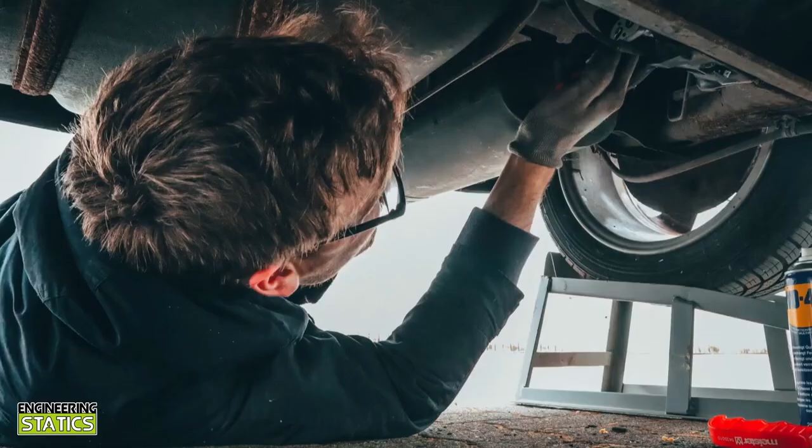Let's start with what it is not. Don't confuse the word mechanics in engineering with the profession of a mechanic. Although in engineering you will learn the wonders of WD-40 and duct tape for fixing things, this is not the core of what mechanics means in an engineering sense.

For engineers, mechanics describes the behavior of bodies in terms of a state of rest or motion when subjected to forces. There are three key words in this definition: bodies, motion, and forces. What do we mean by these terms?

The term bodies refers to any physical object, such as an aircraft or a rocket, but could really be anything, even a potato. In lots of mechanics textbooks, you will see generalized bodies drawn as potato-shaped blobs like this. We will often use such a representation of a body when introducing new concepts in this course, and you will often hear me refer to it as an engineering potato.

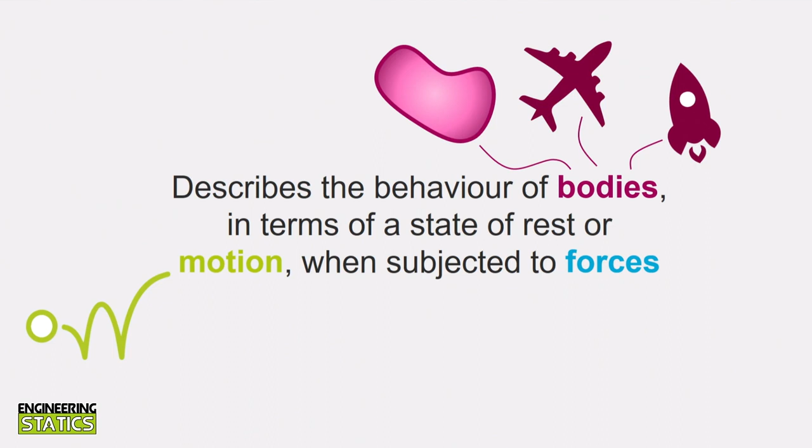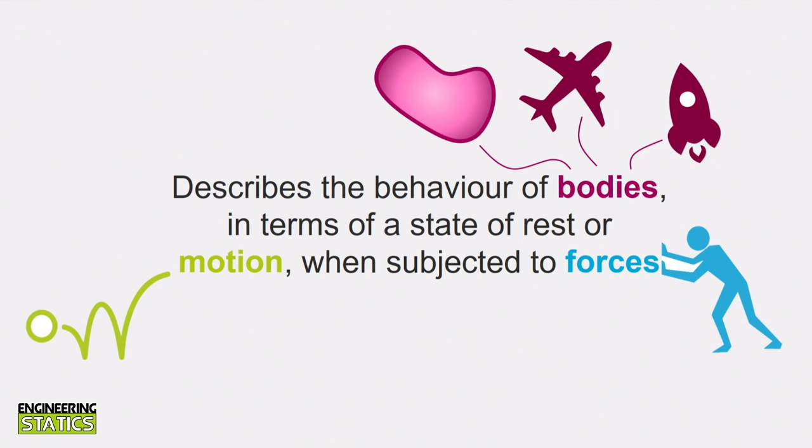Motion is a more obvious term. It refers to how a body moves, including both translation and rotation, as well as speed and acceleration. This leaves us with forces. Forces can be defined as interactions that will change the motion of a body if they are unopposed. How can we think about that in practical terms? If we want to move an object, we can either push it or pull it. So we can think of forces as a necessary push or pull to cause motion.

Lucky for us, a really smart physicist by the name of Isaac Newton came up with some handy laws to describe the interrelationship between forces, bodies, and their motion. As smart people tend to get their name attached to smart things they do, these laws are aptly referred to as Newton's three laws of motion. So let's briefly review these laws.

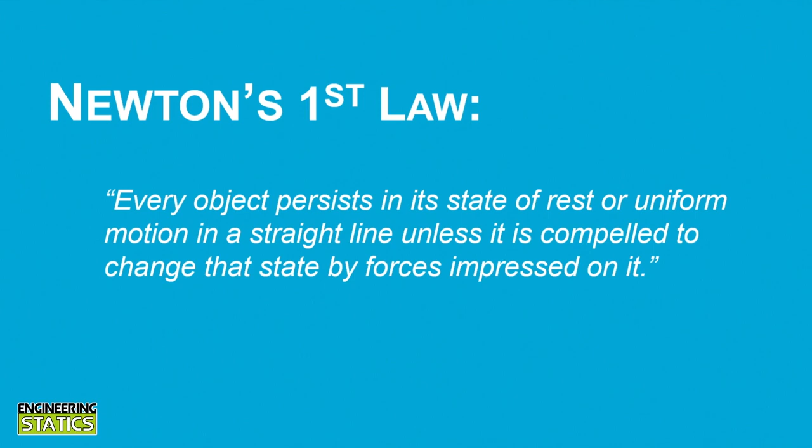Newton's first law states that every object persists in a state of rest or uniform motion in a straight line unless it is compelled to change that state by forces impressed upon it. In other words, bodies are inherently lazy and do not want to change their state of motion. You require a force to push or pull that body from rest, or to change the speed or direction of its motion.

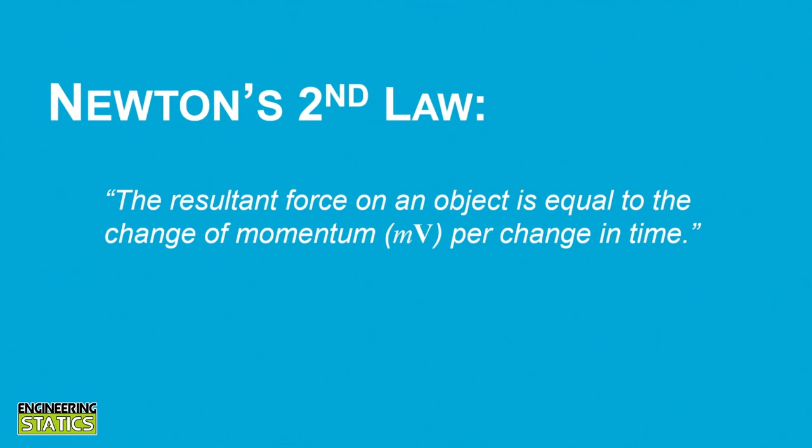Newton's second law states that the resultant force of an object is equal to the change in momentum per change in time. This can be written as F = d(mv)/dt. Now you're probably thinking to yourself, wait a second, that wasn't what I was taught in high school. We were taught that force is equal to mass times acceleration. So did your high school teacher lie to you?

Well, yes and no. Force is equal to mass times acceleration is a special case of Newton's second law. If the mass is constant, it can come outside of the derivative, and the time derivative of velocity is simply acceleration. So yes, force does equal mass times acceleration as long as the mass can be considered constant. This is most of the time valid as an assumption, at least over a small time increment.

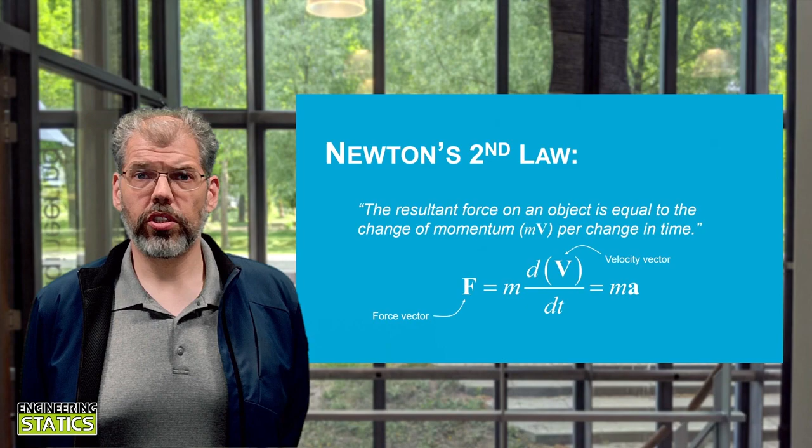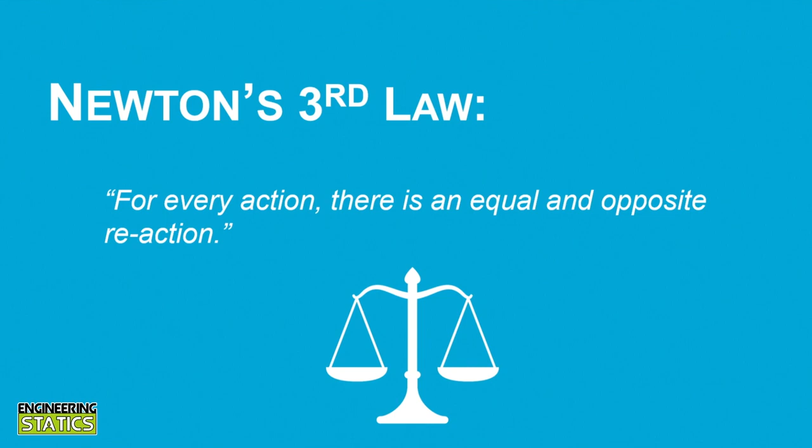Newton's third law states that for every action, there is an equal and opposite reaction. There is a balance to forces, and a lot of engineering is about analyzing that balance, as you will see throughout your studies. Only three laws governing motion, eh? Sounds pretty easy. Or is it?

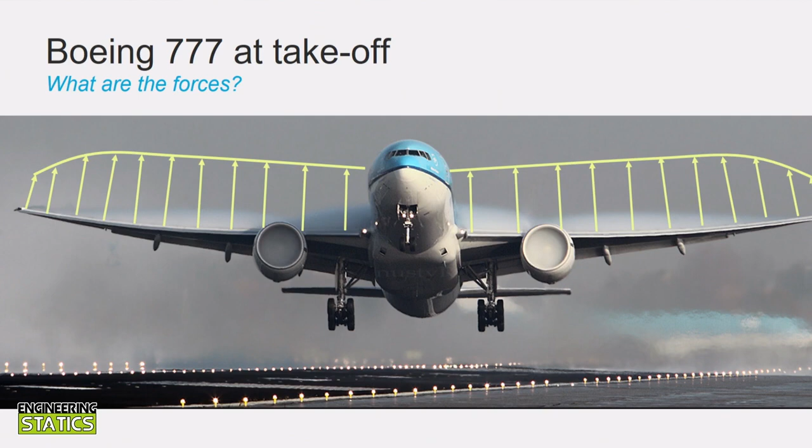Let's try to apply these laws to analyze the takeoff of a commercial jet. Let's start with Newton's second law, force equals mass times acceleration. What are the forces involved in an aircraft at takeoff? During takeoff, there are a number of forces acting on the aircraft. There is the distributed lift force acting on the wings that varies both in the span-wise direction of the wing and in the chord-wise direction as well.

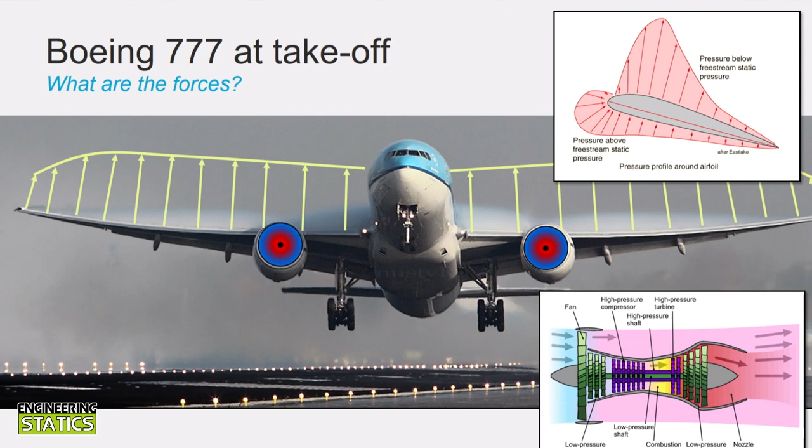There is the thrust of the engines, which also produces a complex distributed load due to the mixing of cold thrust from the fan and hot thrust from the engine core. We then have substantial drag produced by the landing gear and by the entire surface area of the aircraft.

Flight control surfaces such as ailerons can also impart forces on the aircraft, and we shouldn't forget to take into account potential loads due to wind gusts. But that is only one side of the equation. We also have to think about the accelerations.

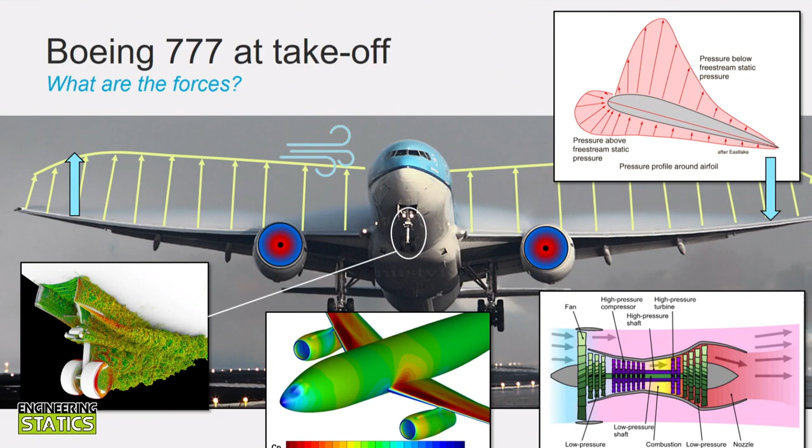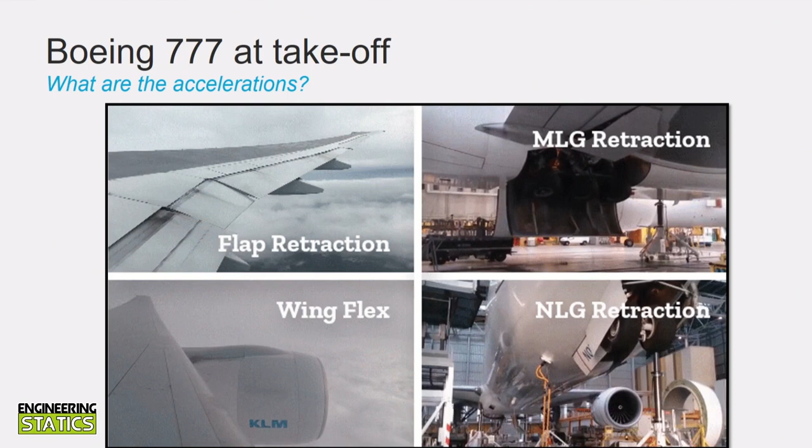In addition to the overall acceleration of the aircraft, there are local accelerations occurring as well. The wings flex, causing different accelerations along the wing, and the flaps and landing gear will begin to retract to reduce drag. As these states of motion continuously change, all of the forces we previously mentioned will also be changing, making the state of motion quite complex to analyze.

So the only way to practically do this would be with a tremendous amount of computational and engineering manpower, just to get one answer, the takeoff conditions. Additionally, in design situations where you're trying to develop a new aircraft concept, the constraints around these calculations will constantly be changing, requiring calculations to start from scratch time and time again. So what can we do about this?

Well, as you will learn throughout your engineering career, engineering is about making models, and models are basically simplified representations of what we are really interested in understanding. So for a lot of engineering analyses, we simplify the problem greatly so that we can produce quick calculations that can be used to make early design decisions.

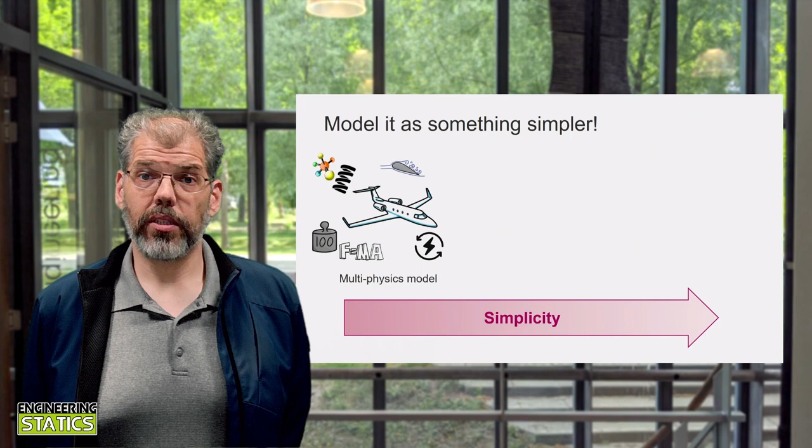For instance, we can take all the complicated physics and aerodynamics of an aircraft and approximate them as simple distributed loads. Alternatively, we can simplify further by reducing the aircraft to a single point mass, with all the complex loads represented as resultant forces.

Now you may ask yourself, don't we risk being wrong in our calculations by oversimplifying? Can such simple models really be useful in the context of something so complicated? This is where I need to tell you a big secret about engineers. Engineers are not concerned about being right. In fact, I would argue that engineers are never right. But that's okay, because engineering is not about being right, but being right enough.

We will make assumptions and simplifications that make our results ultimately wrong, but right enough to be useful in our design process. But there is a caveat to this. Ultimately, people's lives depend on our engineering designs functioning properly. So it is very important to know the limitations of our engineering models and the consequence of these on our designs. This is why it is so important to focus on conceptual understanding throughout your engineering studies.

It is critical for you to understand the concepts behind different analysis techniques and engineering models so that you can properly assess if they are right enough for your application. This is also why you may find your professor paying a lot of attention to whether or not your answer makes sense in the context of the problem at hand. We need to be critical of the results we obtain and not simply follow steps and procedures. But we'll talk more about this in a later video.

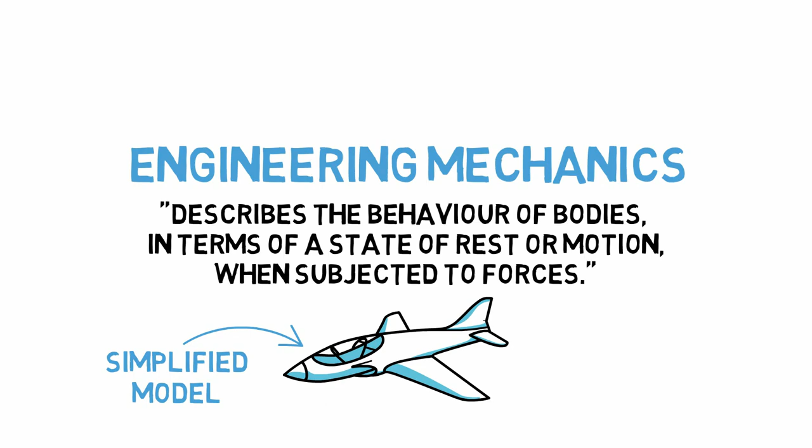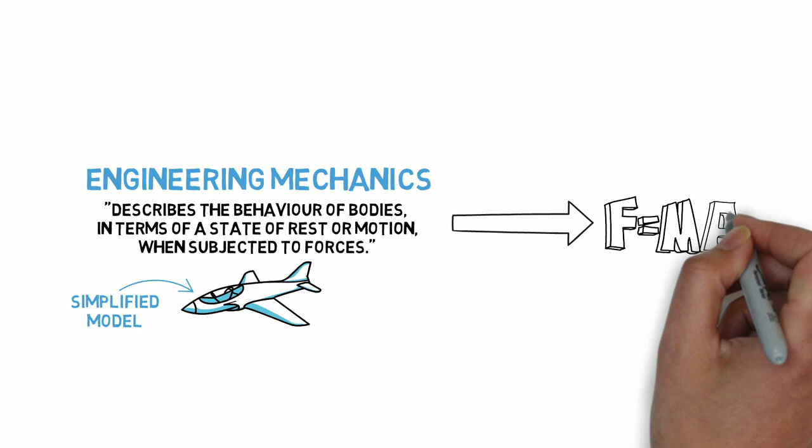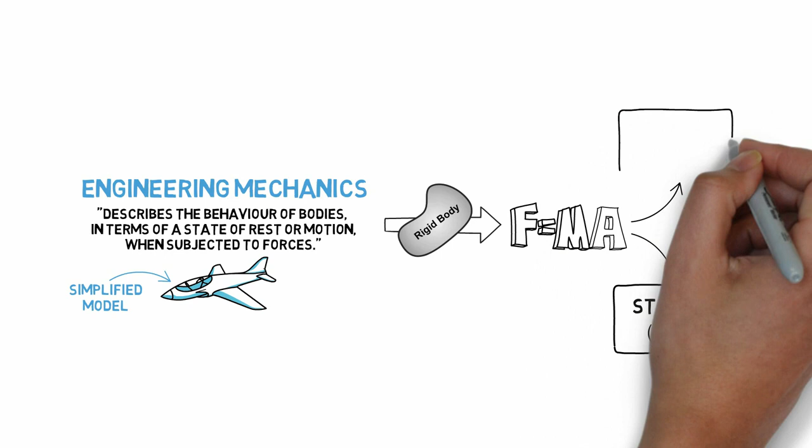We have covered that engineering mechanics is the field that describes the motion of bodies when subjected to forces, and that engineers use simplified models to describe this behavior. Then why are there so many different courses on mechanics? Essentially, we start at the simplest case and slowly introduce more and more complexity into our models. At first, we'll start by modeling bodies as rigid objects, examining Newton's laws of motion for when the body is not accelerating, a course we call statics, and then when the body is accelerating, a course we call dynamics.

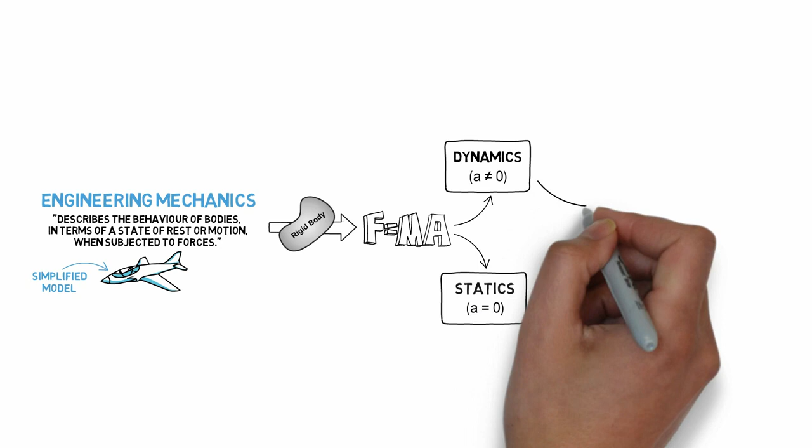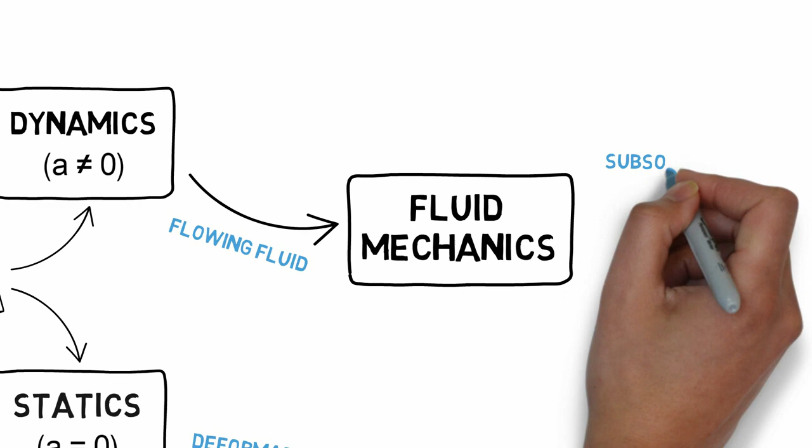However, as you will learn, it is not always appropriate to model bodies as rigid objects. Sometimes we have to consider how the material within the body behaves. We introduce the deformation behavior of solid materials in the course Solid Mechanics, sometimes also referred to as mechanics of materials. Fluids also behave differently than solids, so we examine appropriate methods to model fluid motion in the course Fluid Mechanics. Even this course can be further subdivided to recognize the differences in behavior of fluid flow that is subsonic, transonic, and supersonic in nature.

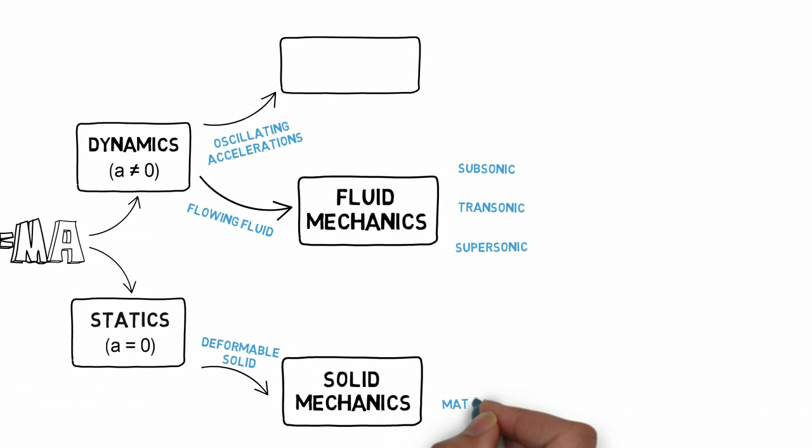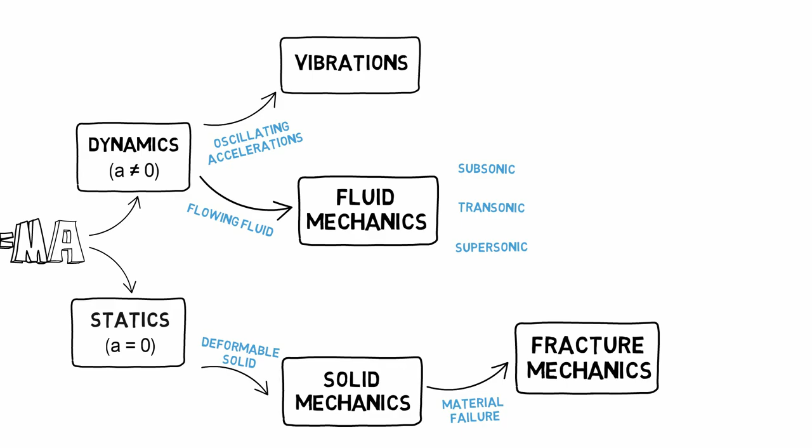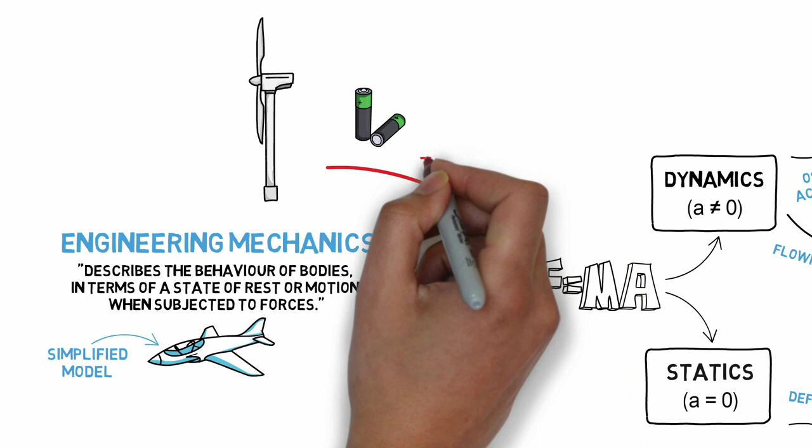Then there are aspects such as oscillatory motion and material failure that can also further complicate our engineering models, leading to courses in vibrations and fracture mechanics. And this is a highly simplified view of these topics you'll be examining in the context of engineering mechanics. In order to describe the forces involved in our models, we have to examine concepts of energy and energy transfer in the field of thermodynamics. That thrust in an aircraft engine doesn't just appear out of thin air.

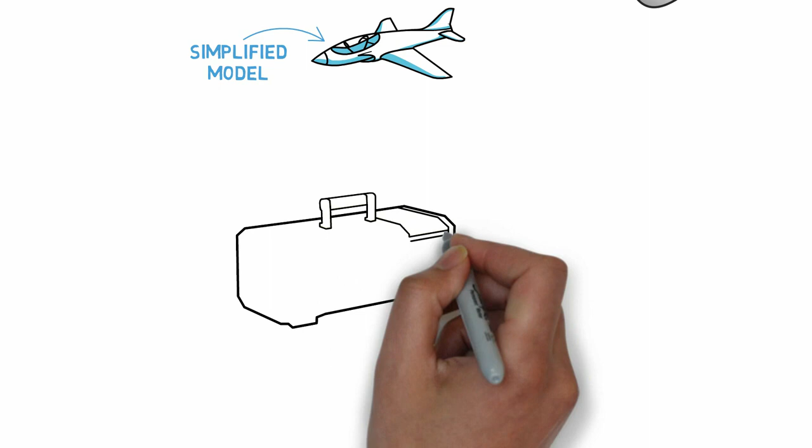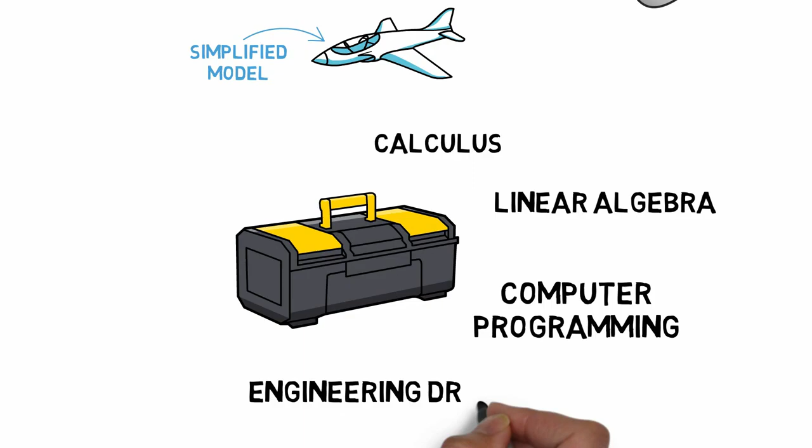And in parallel to all of this, we need to equip you with many additional tools to perform your analyses. Different fields of mathematics, programming skills, and even drawing skills become necessary tools in this engineering toolbox. Wow! As you can see, it takes a lot of effort to be wrong like an engineer, but also right enough like an engineer.